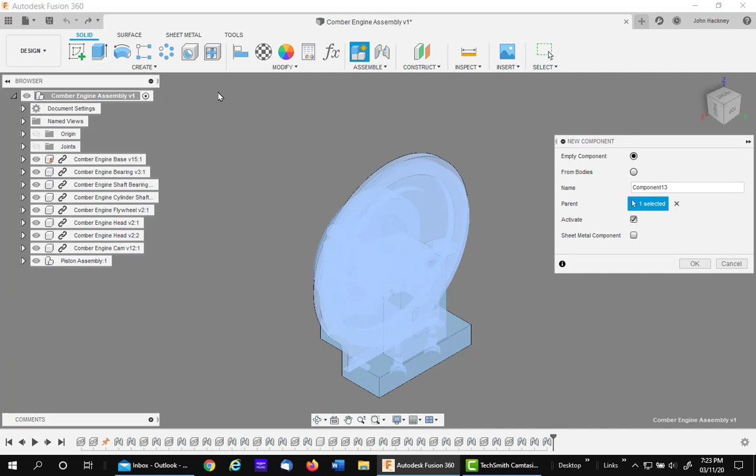So let's get started. To show the process of creating a top-down link component, I'm going to design a base pad for the small steam engine. So to start, I pick create and we get a new component. It's going to be related to the top level, but the name is not important.

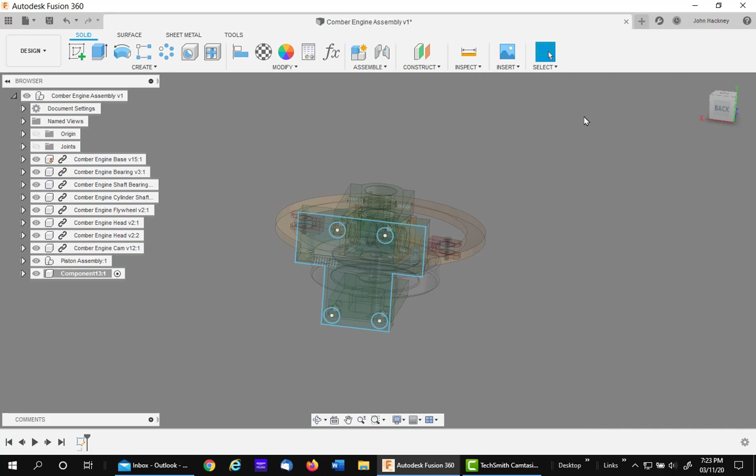Next, I'm going to turn over and I'm going to make a sketch on the bottom face. New sketch. I'm then going to project. I'm now going to link the component to the bottom base. Finish my sketch. At this point, I'm going to extrude it out 1/8 of an inch. There we have the base pad in place.

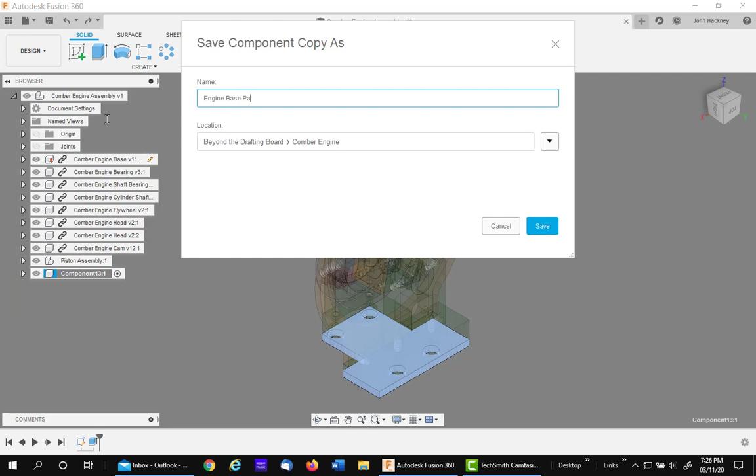At this point, it's just a component that was designed in contact with the base plate in the top level assembly. I want to make it a link component. So I right click on this, go up to Save Copy As, and I'm going to call it Engine Base Pad. I'll put it in the same folder as the top level assembly.

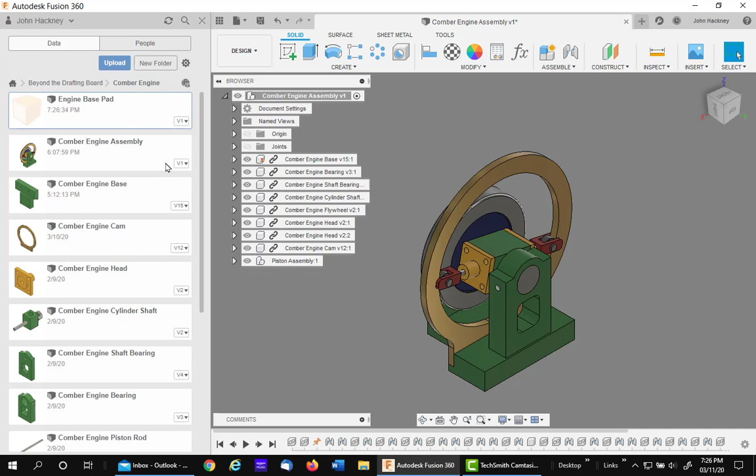Next thing I'm going to do is right click on it and delete it from the assembly. Next thing I'll do is go up to the database, right click on it, and insert it into the current design. You can also drag it. At this point, you'll notice it's in the right position, so I just say OK. We now have a link component, and that's what we wanted all along.

You'll notice that it has a work plane. We'll get to that in a few seconds. Right now, this component is not constrained, but it is in position, so I can use an as-built joint. I want it to be rigid, so I pick on the base and I pick on the part, and they'll go together. So now it's fully joined in the assembly as a link component. So we have achieved our goal in making a top-down design component and then reinserting it as a link component.

Now, let's deal with the work plane that was created automatically because it was an adaptive part. Fusion 360 just went through an update, and one of the update features was the ability to edit a link component in place. If you come to the component, you'll see at the end a little pencil. You can also right-click the component and go to Edit in Place.

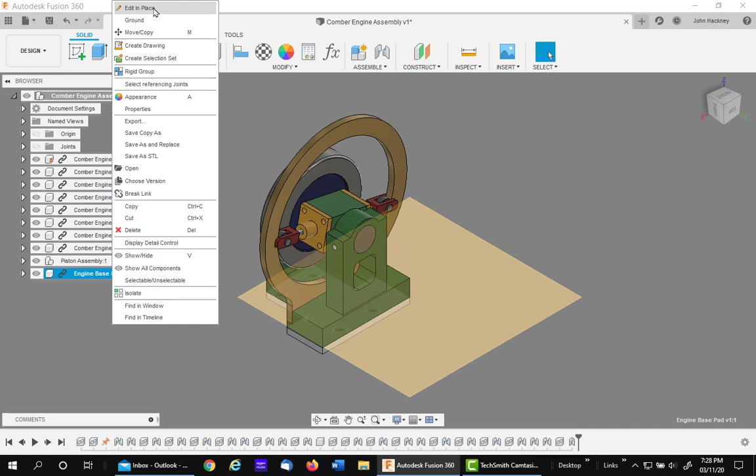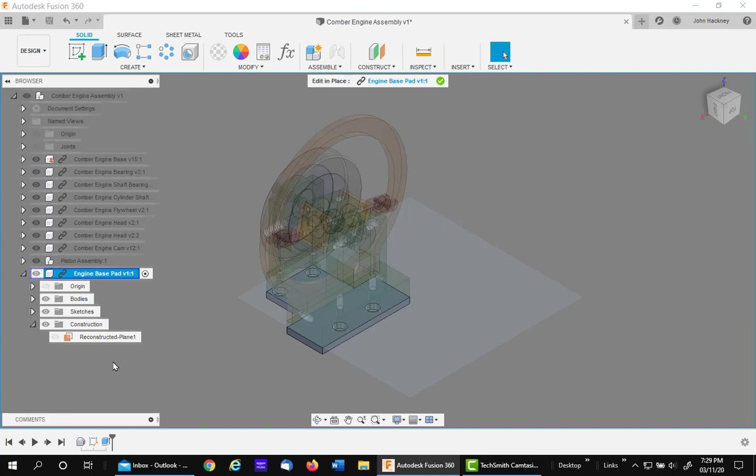Picking that, you'll notice it ends up showing you everything else grayed out and just that component being edited and active. Notice up here, to leave this function, you hit the green check to end the edit in place. All I want to do by editing is to turn off that construction plane, make it invisible. I'll then exit it. Now as you can see, I have a link component, the plane is gone, and I'm back in the top level.

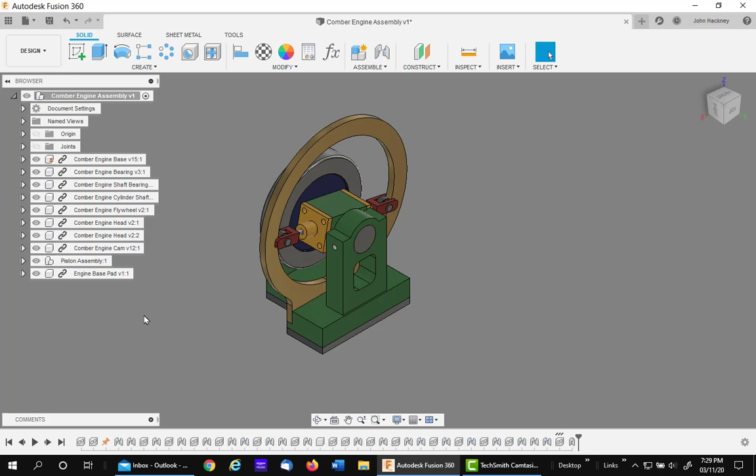So there is my solution to the argument that you can't top-down design in a linked component assembly. It is a couple more steps, but it gives you the ability to always have save as and replace. I hope this helps in your design in Fusion 360.